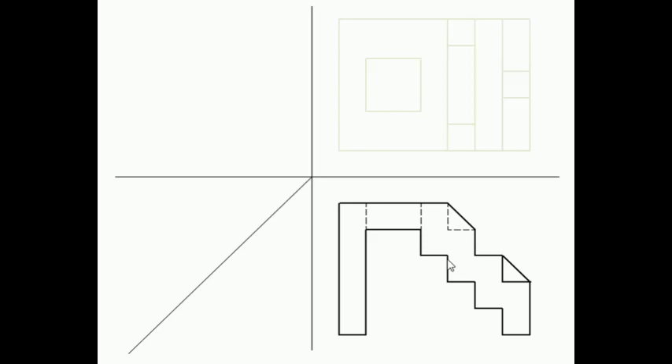I've drawn the front view of the object. We now need to draw the top view, or then perhaps the right view. But in this case, I'm going to do the top view first. So the top view is going to be on top of the front view. But we need to project. That's why it's called first angle orthographic or third angle orthographic projection.

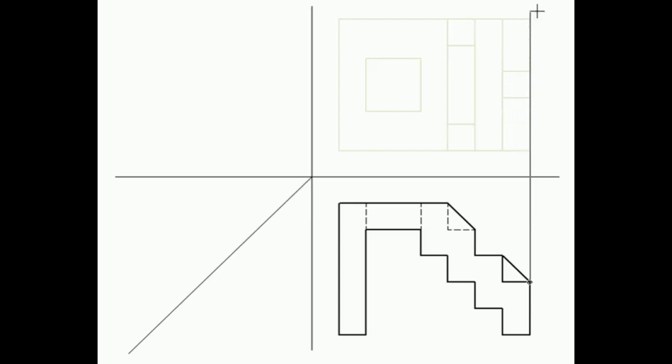So I'm going to project the top view. I'm going to start off by projecting lines from each one of these points. From this point, I can project upwards. From this point, I can project upwards. Because if I look from the top, I'm going to see that point. If I look from the top, I can see this side here and that corner. If I look from the top, I'll see that, I will see that, and I will see the hole that's inside. So I'm going to project.

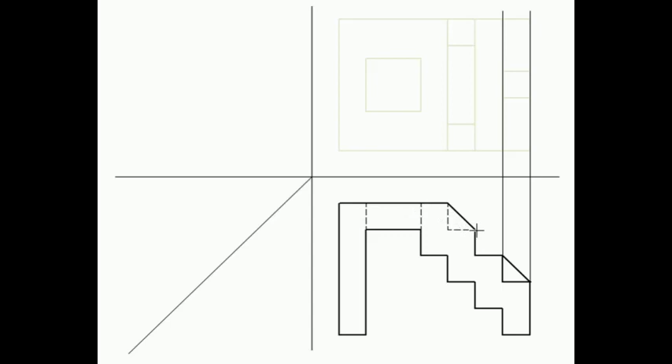So that's why it's called orthographic projection. So I project that one. I'm going to project where this hole should be. The same on this side of the hole. The same on this side of the hole. Then I'm going to start measuring. Let's draw this line.

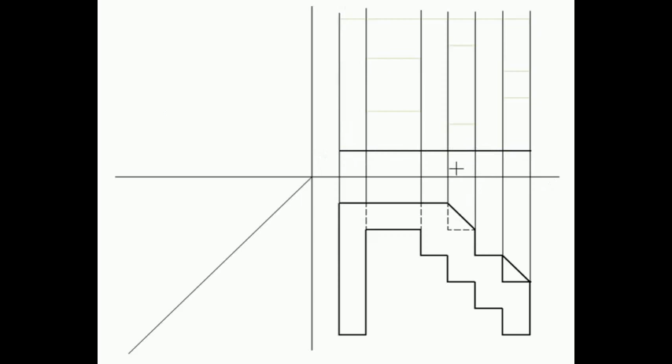Then they tell us that there's a little part here, a part that runs at an angle, which is 10 millimeters from the right hand side, or from the front side in this case. So I'm going to draw a line, measure that distance 10 millimeters, but it only stretches up to that point.

Then they tell us the following, that from the very bottom to the very top, if you look at your drawing on the right bottom side of your original drawing, you'll see that they give you three sizes, 20, 10 and 20. So I'm first going to measure 20, which gives me that little rib in the middle, this rib here. That is 20 millimeters from the front side. So I'm going to draw that rib. I can measure 10 millimeters and draw that rib. I'm going to measure 20 millimeters and draw the full size of that drawing. At the back, I can complete that drawing.

Right, I see a step here. So I'm going to see a full step there. That's why I'm drawing it as a nice outline. I can see a step here, so I project and I draw that one. There should be a line there from that side inwards of 10 millimeters. So I'm going to draw that. It's the same as this diagonal line, but on the back side of the drawing, this being the front side of the drawing. Then there's another step here from this side to that point.

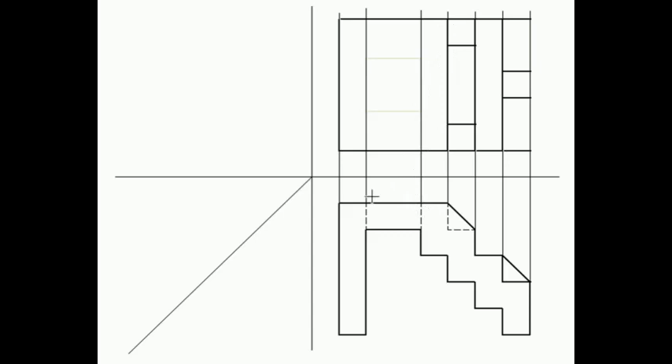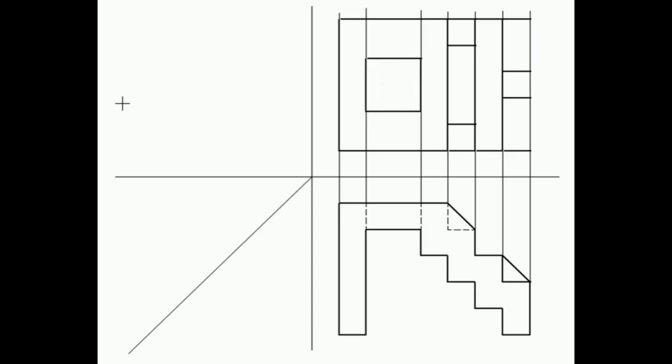There's a hole here right in the middle. So the hole has got 15 millimeters from that point to that point there, and I'm going to draw that line. The hole size from front to back is 20 millimeters. I'm going to draw that. I can complete the hole. And I'm going to delete all the projection lines. You can now see what the top view should look like. This is the top view.

Yes, there would have been hidden detail here, and one could put hidden detail in there to show this and that part. But I'm not going to go about it because hidden detail is not asked for.

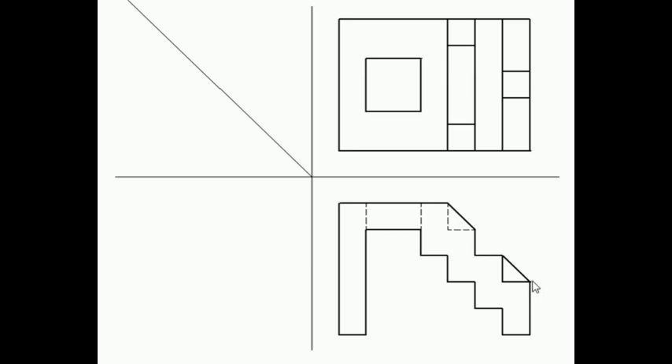The right view is seen from this direction. Look again at this arrow. From that point, we're looking in that direction. So we're going to see this flat face. We're going to see that little rib.

We can see each one of these steps. Right, now I'm going to project the right view. The right view must be on the right side of the front view. And I'm going to project once again. So, projection. Let's start with the very top. I'm going to project from that point to this point.

I'm going to project that corner. I'm going to project this corner. I'm going to project this one, as well as the bottom. To get these ones, I do not have to measure once again. I don't have to measure the 10 and the 20s and the 10 and the 15s and so forth. I can directly project. So let us do that from the top view.

I'm going to project from my top view up to this point and from that point down. I'm going to project that point there up to that 45-degree line, and from that point straight down. That's going to give me the total size of my drawing. I can in actual fact go ahead and draw this rectangle, but let's draw the bottom one. So from that corner, that's the bottom.

Then this corner that I'm going to see runs from the very front side to the very back side. So I can draw that. The same with each one of these steps. They are visible from left to right, visible from left or front to back, visible from front to back. Right, we have this part, which is that part there at a slight little angle. So we're going to put that in.

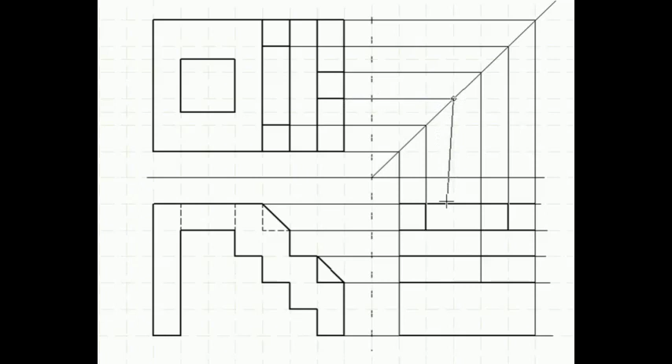We know that distance is 10, but we just project that, and we project that, and I can now draw that line, or two lines actually, from that point to that point, from that point to that point, and that's going to give me my total drawing. I'm going to wipe out all projection lines.

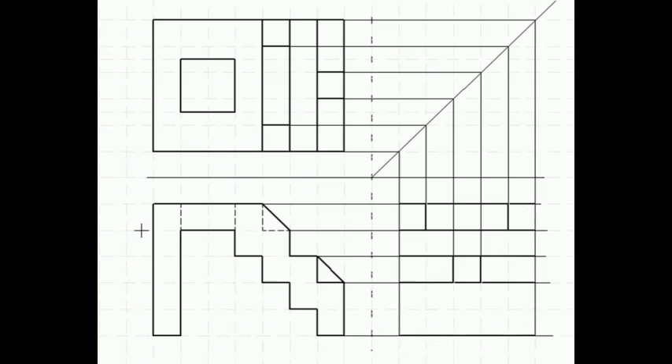Oh, I forgot. I should still add the sides. So let's draw the sides. The side on the back side is this one. The side on the front side is that one. And now I will delete all the projection lines. And when I'm done, that's what my drawing should look like.

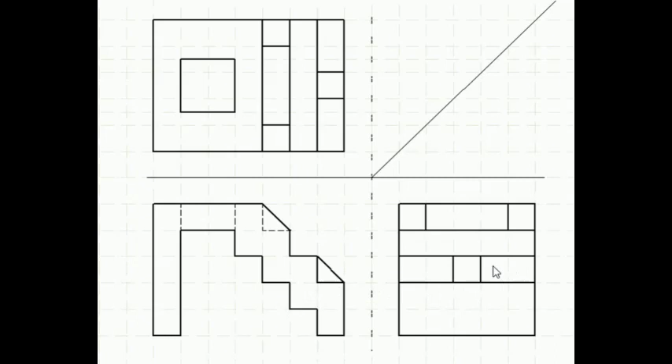So I did not just place these views randomly all over the place. I've placed the top view right on top of my front view so that I could project those lines. I placed my right view on the right hand side of my front view, and I've projected these lines. That's why we call this third angle orthographic projection. We must be able to project, and the views must be placed correctly. The right view on the right side, the top view on the top side of your front view.